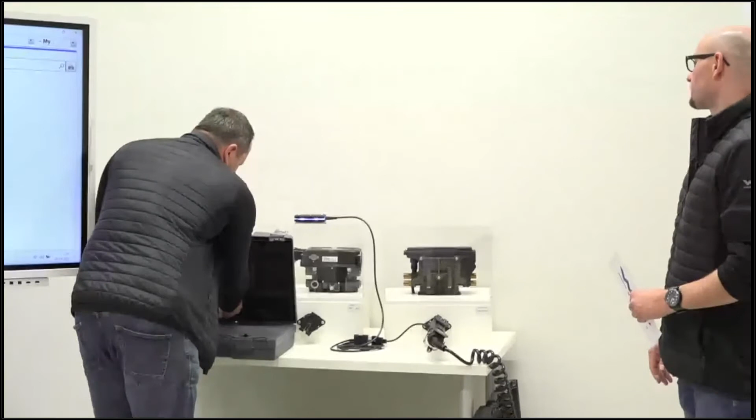Let's compare this to the original hardware solutions - how much hardware do we actually need? If we speak about the side sockets, we have to provide the same number of cables to make it 100% compatible, but the big benefit is that we just need 1 ISO cable for all of them. It's easier to handle, easier to keep in the case. So basically: ISO cable, VCI box, and maybe a few adapters for the side socket. If the customer only uses EBS, then you just need the ISO cable.

Then coming to the next step - how do I make sure which modulator I have in the trailer? It's simple in theory: if you have access to the trailer, you can make a visual inspection. And for this we provide information for whatever manufacturer you choose.

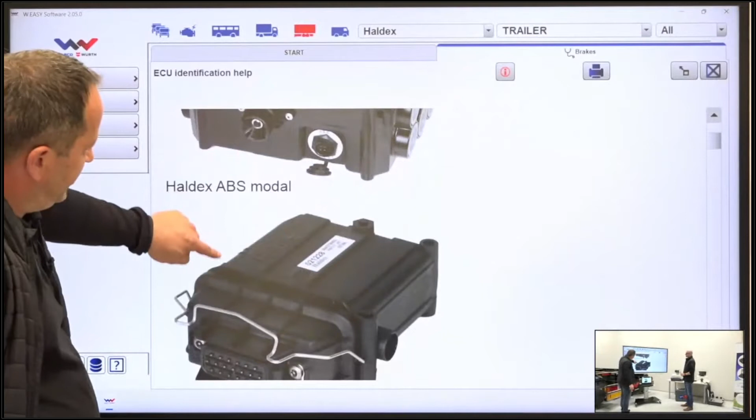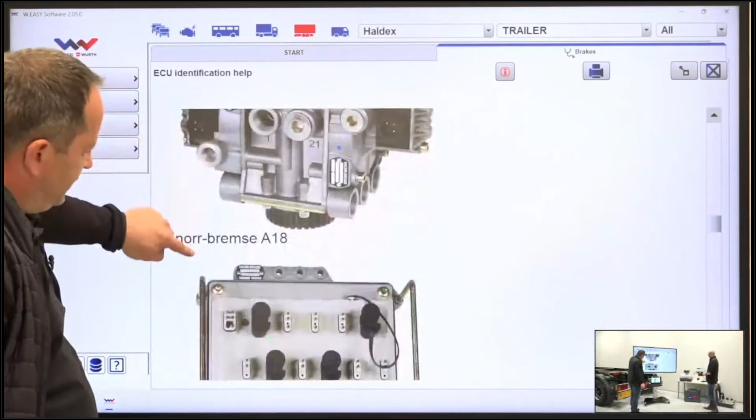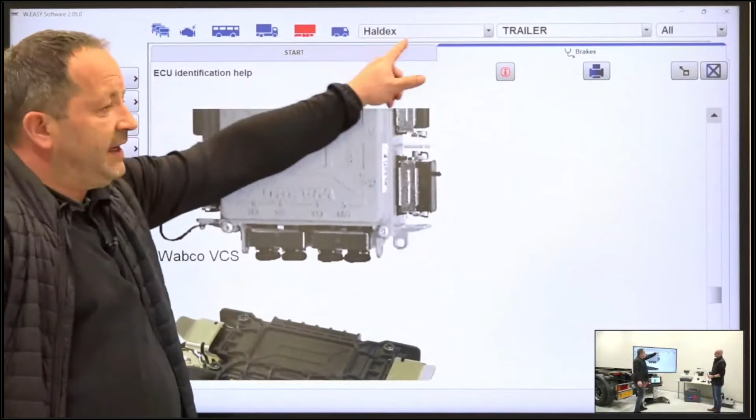For example, Haldex, because it's first on the list. You go to systems, and you have a category button which we call ECU identification help. Here you can find pictures with all the models they provide. So even if you choose Haldex, you can also see Knorr solutions, and all the generations of WABCO. So even if you make a wrong selection at the beginning, it doesn't really matter, because you can compare with your visual inspection - they are pretty different, so it's very hard to make a mistake.

Which of them are mostly used? It's very hard to say, it depends on the market. I'd say in most European countries, Knorr and WABCO are the leaders, but there are some countries like France and UK where you can find more Haldex.

I'd say this is the most common way to identify. Obviously, you can use some stickers on the trailer, you can see some advertisement from the manufacturer somewhere. But you have to remember this is also a part which can be replaced for whatever reason, so you can have stickers originally from Haldex, but it was switched to WABCO later on.

Starting with the Knorr Bremse modulator - if we know how it looks like, we can choose the corresponding manufacturer from the list here. We don't need this anymore, so we can close it, and go for the manufacturer selection.

And then obviously it's a part where you have to care about the power. So you need to provide the permanent power from the battery, from the vehicle battery, and you have to switch your ignition. This is very important, otherwise the modulator will not work. Sure, so we need to connect this to the source of power. In our case, in our situation, it's a case. We need to care about the ignition on, so key on, or there is a button in the truck, or whatever else solution, and then we can start to communicate.

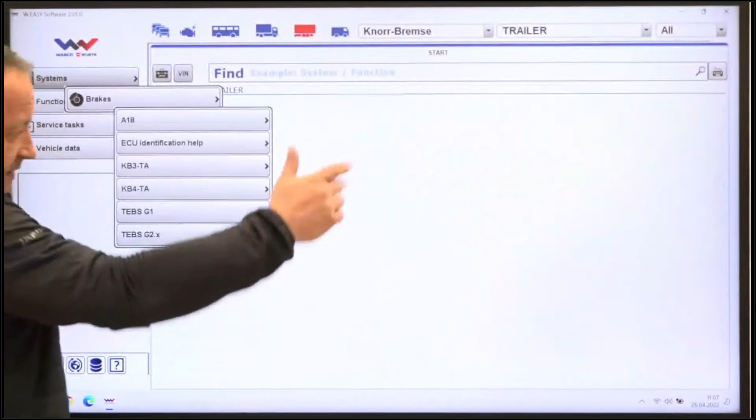So in this case, based on our visual inspection, we choose it's a second generation. In our software, we provide the function to automatically recognize which generation of the EBS it is. So if it's not ABS or the modulator, then you can use this button.

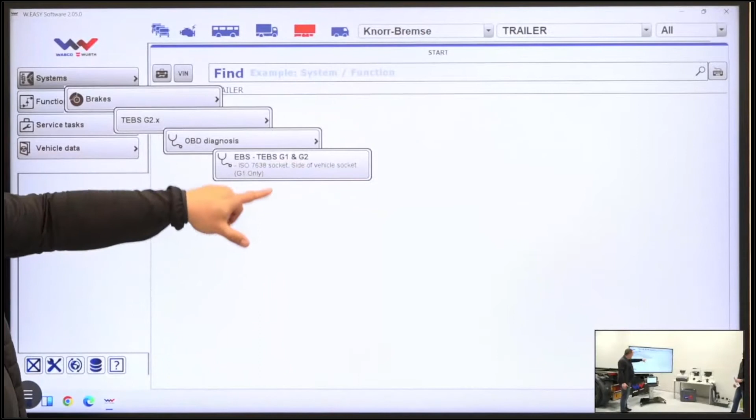You can see here, it does not really matter if it's a side connector or ISO cable. There is just one selection. Then the software will try to communicate with our box. So it checks all conditions, the firmware and other stuff is there, tries to identify the system. You can see the box is changing color, informing us about the status. And if it's connected, then you can see the menu.

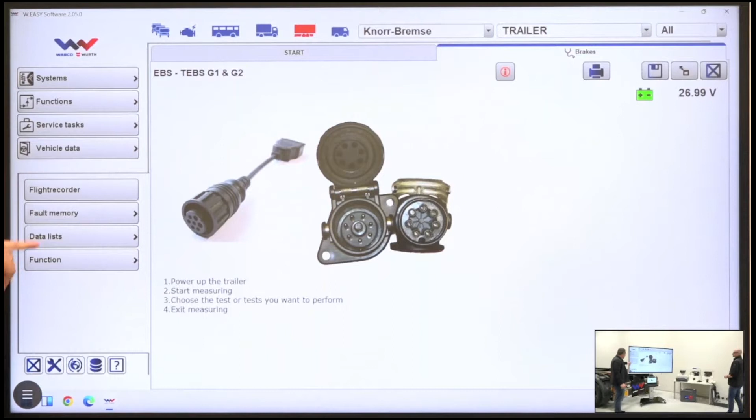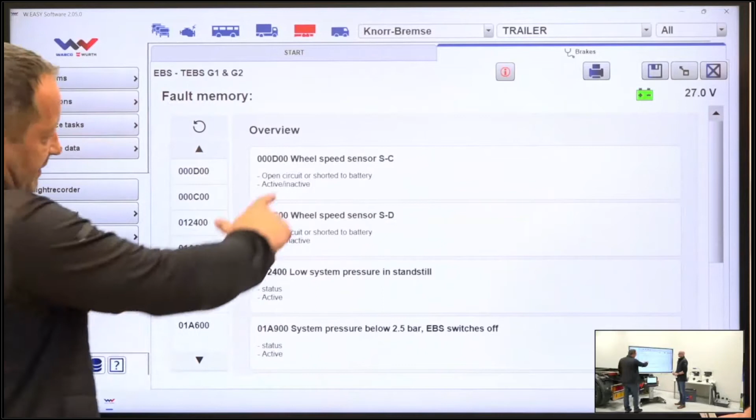So the first or most commonly used function is obviously reading the fault codes. This will be our reference to start to find the problem. So we have some indications about the wheel speed sensors. Obviously it comes because this is just a plain modulator without any accessories. So we have a trouble code number. This is a number which comes from the manufacturer, so it's not our indication, it's the original indication. There is a basic explanation of what this number means.

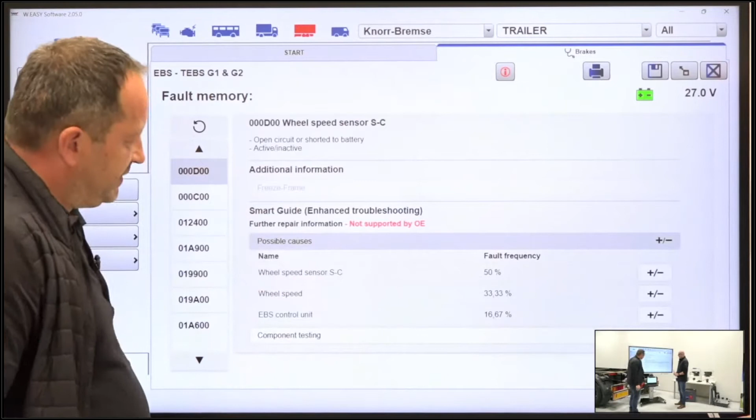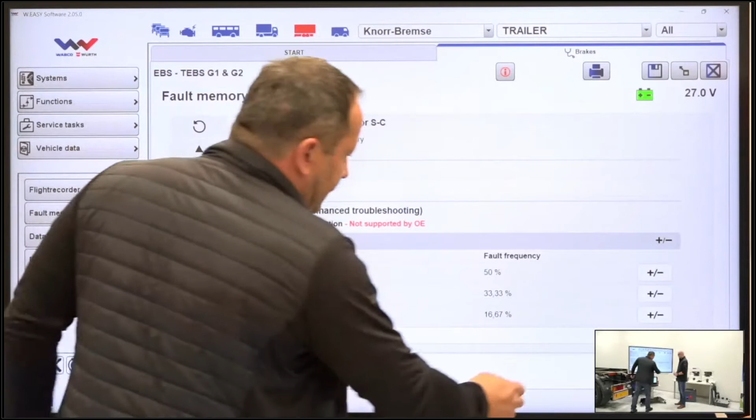Then you have a status, if it's active or historical or inactive or permanent or sporadic or whatever else. And what we also offer in addition is the step-by-step instruction based on, let's say, OE suppliers' statistical value about the possible causes, being part of the smart guide. Of course, we call it smart guide, but in fact it's some kind of step-by-step instruction. So you can obtain how often this happens. Obviously this could change during the life cycle, but this is something we can provide.

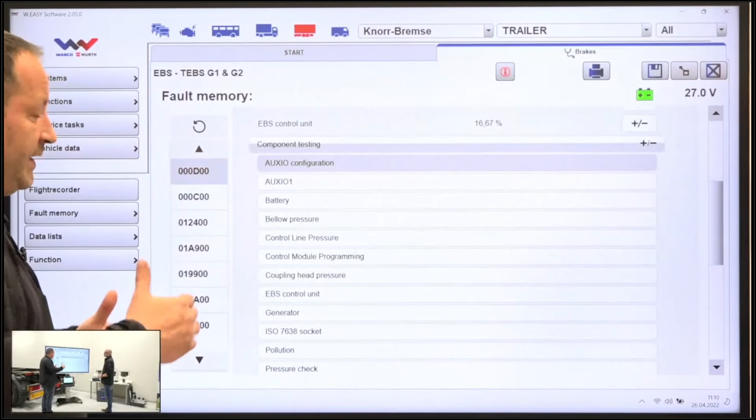And here we have also the category of component testing. So if you need some additional tests to provide additional information about what could be a cause, or to eliminate any other source of the problem, then you can go there and see a text description which gives you the impression of what you have to do step by step, what kind of values you should expect, and so on. So this is not OE software, this is multi-brand software which is provided by us, but we try to follow the OE recommendations for this.

That's a brief overview. I get connected, I can read out the fault codes, I can read some tips on how to fix the trailer again.

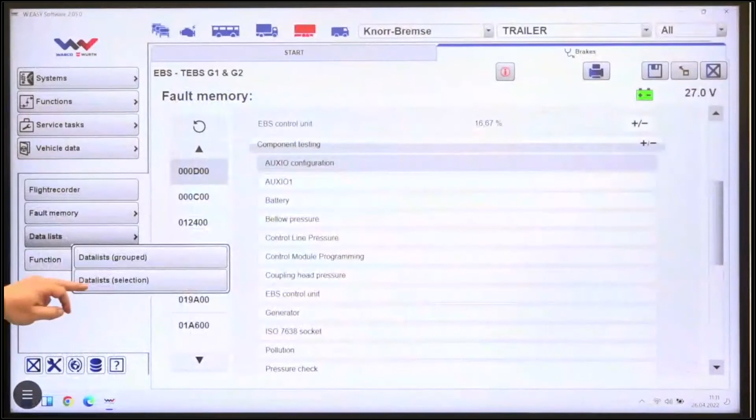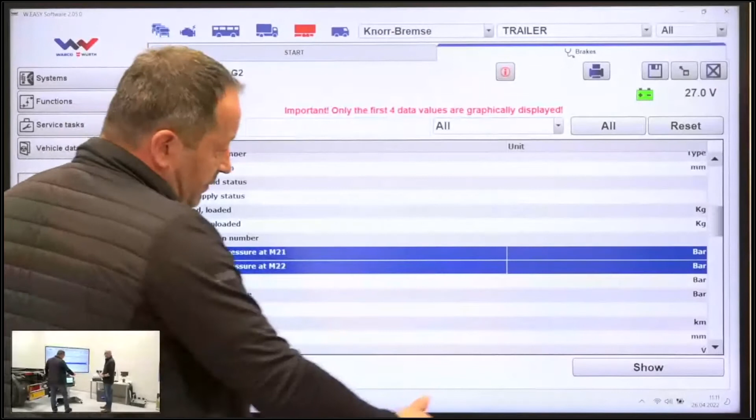Besides these features, what does the software offer? We offer more or less all the values which the ECU is analyzing. So you can take a look, for example, at what the wheel speed value is. You can see here the unit in which this is given. So for example, this will be the bar. You need to select what you like to see and click on show. The software will present the real-time data on the screen. Again, this is just a constellation of plain modulators, so we should not expect any miracles here, but at least in the real constellation, this will mean that the sensors are missing. So it could be a problem which is confirmed by the fault.

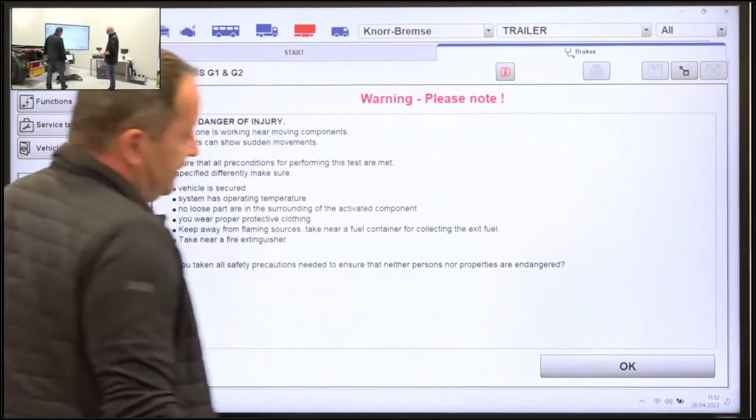Continuing to the function, we have a function category where, depending on the generation, you can find different features. Activations means you can simply send a signal to the modulator to power up, and you should expect that this component which is activated will change its status. You have to observe or listen or whatever else, so it's based on visual or organoleptic inspection.

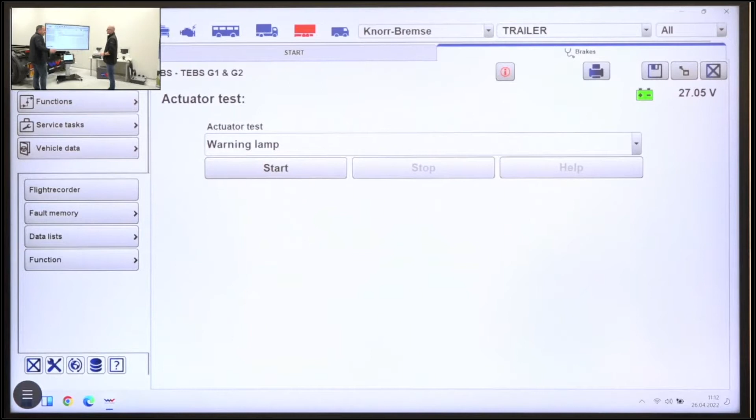Then you have self tests. This list is based on the OE manufacturer. So in OE software you can find the specific functions, and we try always to follow the same logic, the same philosophy.

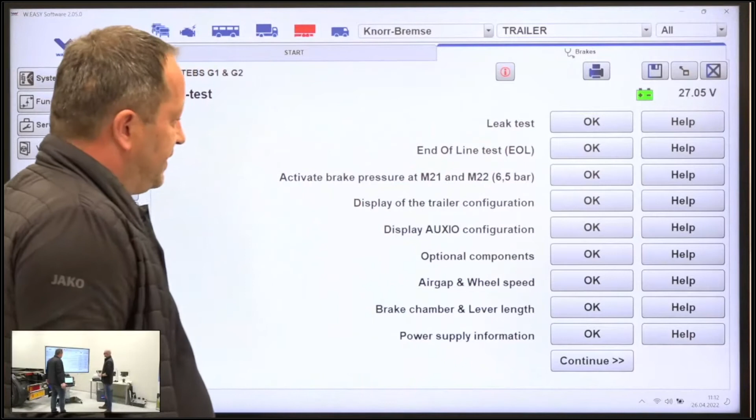You can perform the leak test, for example, if you are not sure if there is any leak in the system. The software will give you instructions on how to do it. You have a help menu which describes in detail what conditions you should fulfill and what you should expect from the function itself.

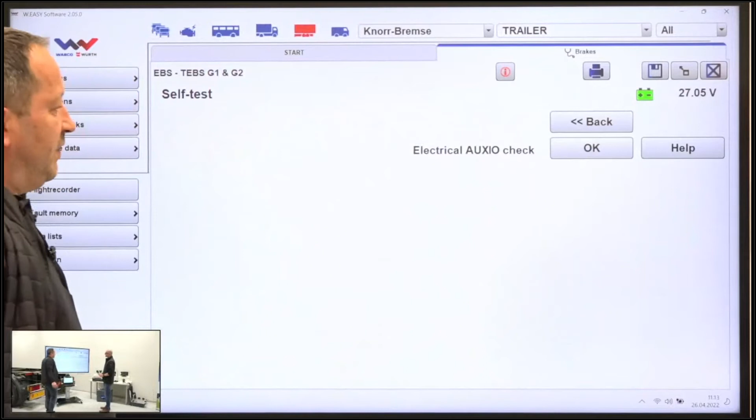We have an end-of-line test which you have to perform after the modulator replacement. You have some specific functions related to parameters, to read them out. You can create the replacement for the ID plate. You can also activate the electrical components responsible for lifting axle, leveling platform, or some external power. For example, if you need fleet management data, you need to equip the modulator with a modem which will send the data.

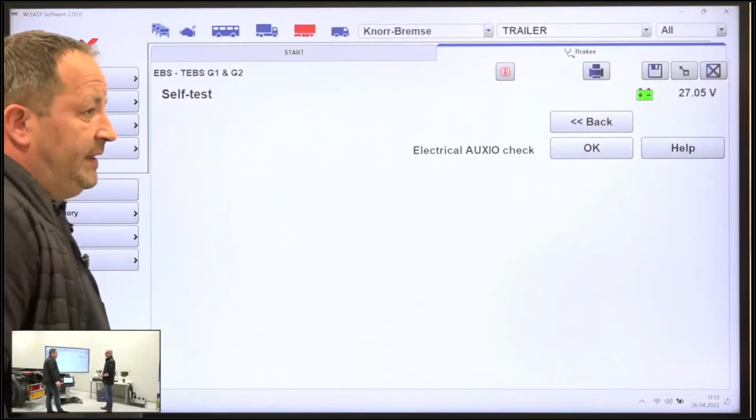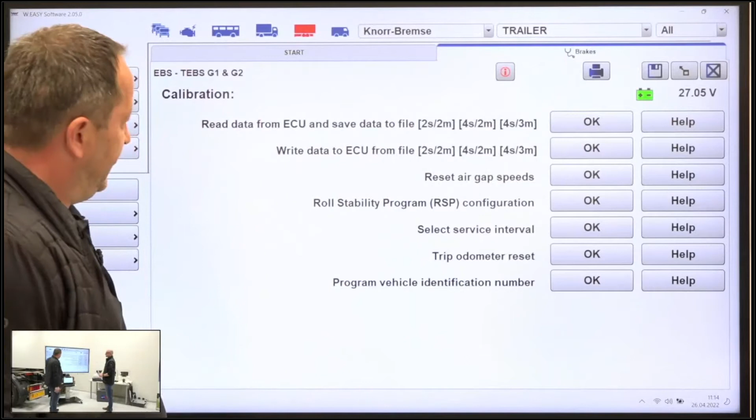And obviously, quite an important function, we provide the possibility to make a backup of all parameters to a file, then store it for the future. In case you need to exchange the modulator, you can simply take another unit, a new one or a used one, and transfer the parameters into the new unit.

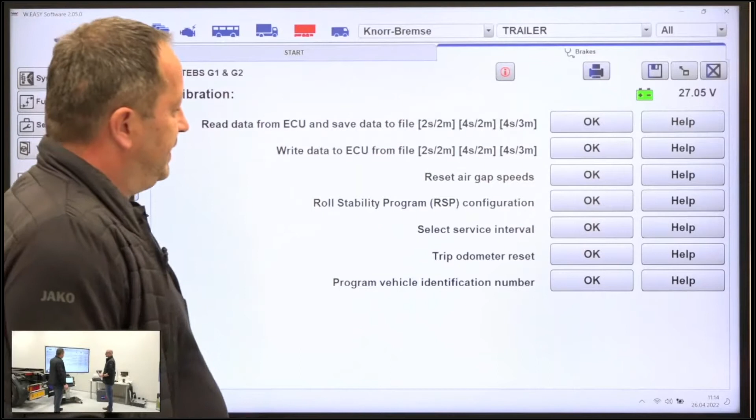You can also read out the service settings. For example, if it's set up that the modulator should indicate some mileage which happened or any other service indication, you can set up when it should happen. Then it starts to blink, indicating to the driver.

We offer also the possibility to change the VIN. If you use a used modulator which is already programmed, you can simply adjust it to the real trailer.

Okay, so this is quite simple in practice. It's nothing special. I suppose everybody can perform this.

So now we will close the communication with this modulator. Milan, please change now to Haldex. Just take care about the ignition.

And so now again, VCI is indicating that it's powered up, and then we need to change our manufacturer to the corresponding one.

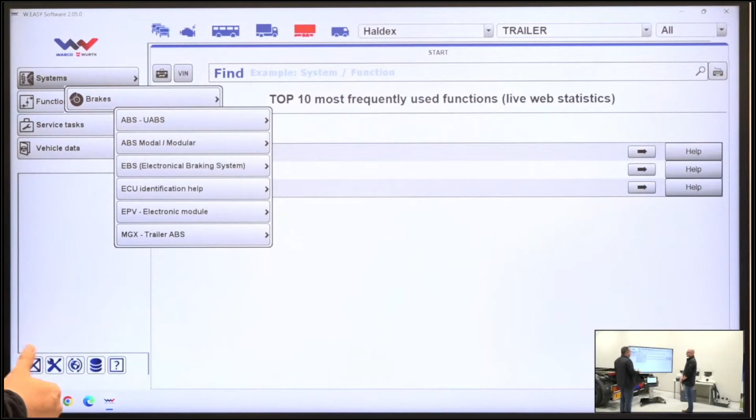Again, we offer more or less the same selection, so you should be comfortable with the menu at least. Obviously our idea was to integrate most of the OE softwares available on the market. So in the case of Haldex and WABCO, we offer the OE software, which is embedded in our framework. It means we offer identical OE software, which is supplied by the OE manufacturer, but integrated in the same framework. In this case, it's an EBS generation.

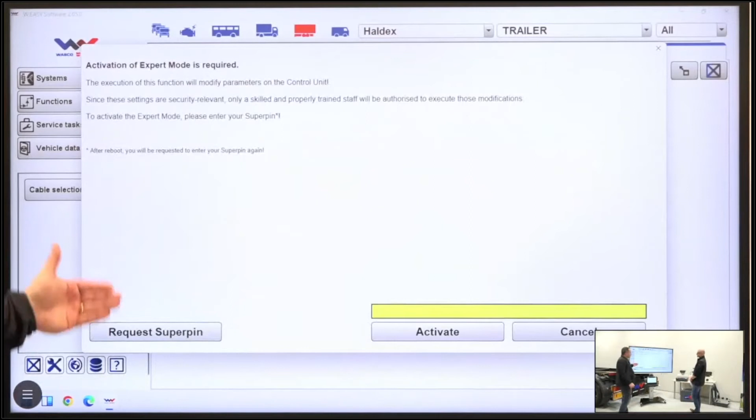And now we need to provide the super pin. Super pin is access to an expert mode, which is given in exchange for confirmation to any customer. It's not really related to any specific training, like in the case of WABCO. It's something you will receive in exchange for a signature. It basically gives you access to all the features in the company, and we provide this feature to a company owner or workshop manager so they can internally manage who they share the super pin with.

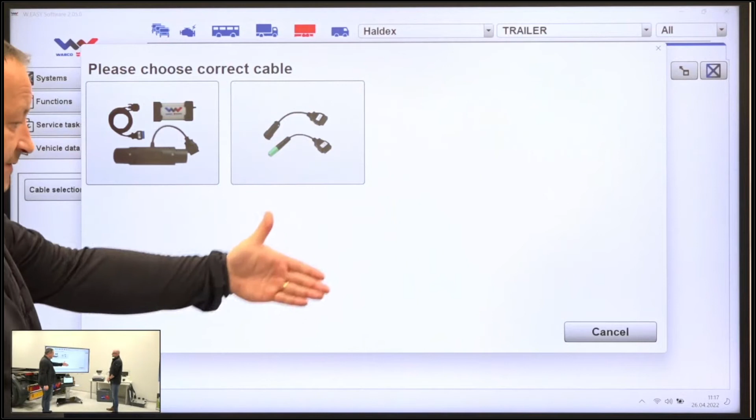In this constellation, it looks a little bit different because, as I said, it's an OE application integrated. So we have to choose which type of connection we will provide. We just follow the real conditions. And then the software will try to connect.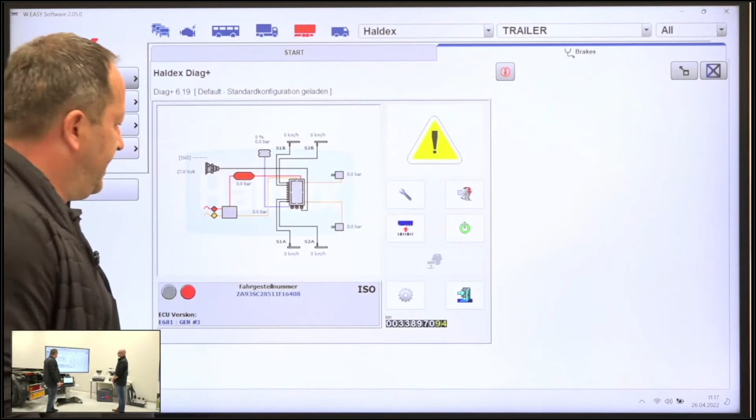And on this initial screen, we should see the actual status of the modulator. You should be able to see some electrical values, if it's powered, if there is any air supply - obviously not, because it's just a plain modulator. Then fault indication, if there are any.

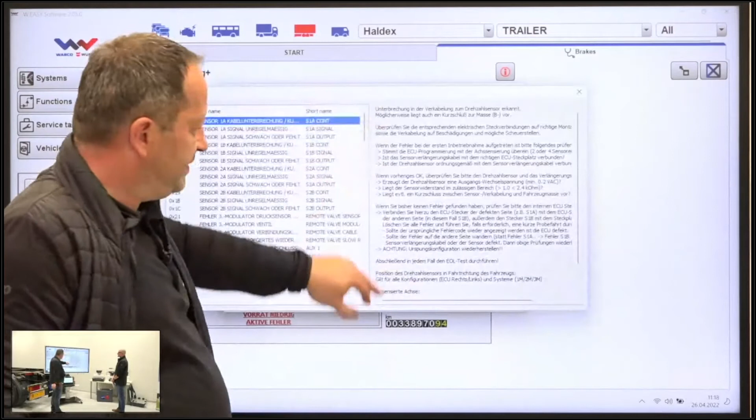So the most commonly used function is the reading of the fault codes. We have a split in the colors: red means active, black means not active, and we provide the same logic. If we double click on it, or use this green mark, we will see what we call environmental data - the conditions in which the fault was registered. Then we can click on additional information to get the instruction, very similar to our smart guide solution. Sometimes this text is longer, so you have to scroll it down.

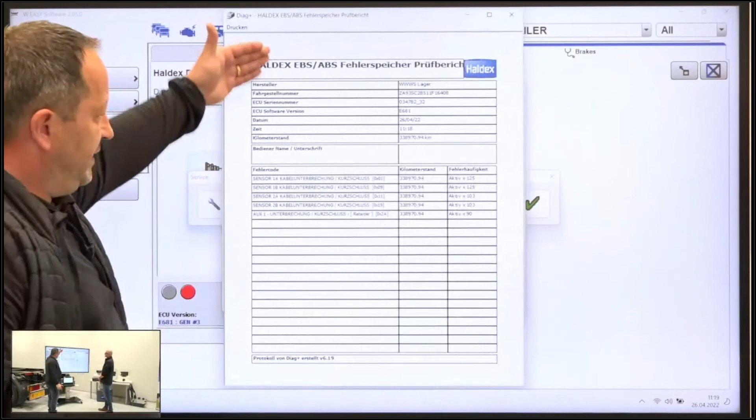And this is provided for all trouble codes existing. So this is OE data, the most trustful source of information. If there are many fault codes, we can use these arrows to switch between them. If we speak about reporting, we also offer this OE format. For this, you can make a printout or save it to PDF.

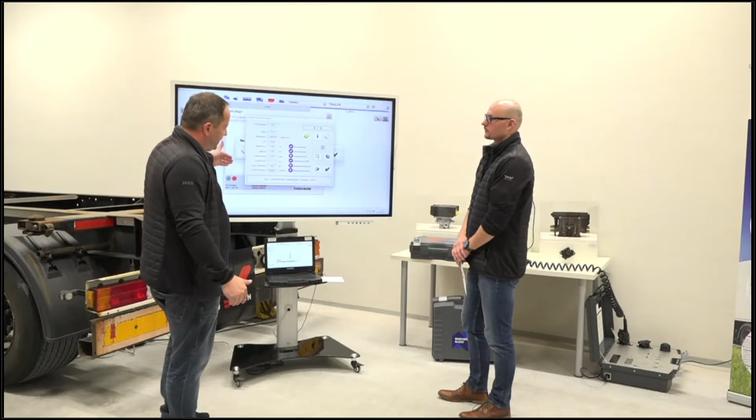We might mention the logic of Haldex, which is related to the super pin access, which gives you access to everything. Haldex do not limit any functionality from their software, so every operator is responsible for what he's doing. In theory he can do whatever he wants, but since he's changing the parameters, he's responsible. That's why we provide this super pin request, and all operations are registered based on this super pin. So every super pin means a physical VCI, which belongs to the physical customer.

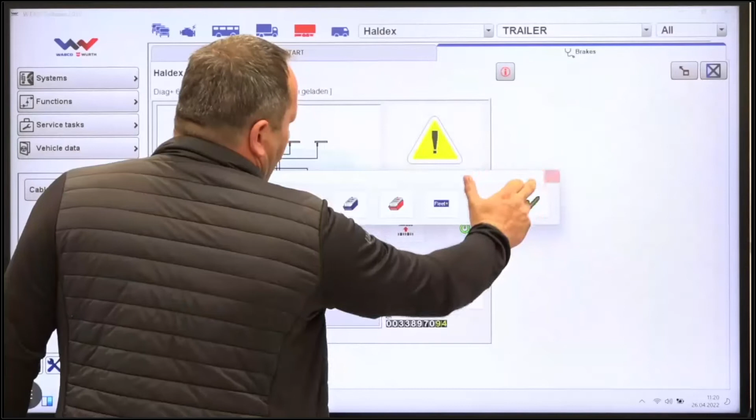And if we came back to the cable selection, there was not just the option to select the ISO cable, but we could also select the two other cables, in which instance we use this option. So if, for whatever reason, we don't want to use the ISO cable or it doesn't work, we can exclude the problem from the ISO cable itself or from this main cable which goes from the truck to power up the modulator. We can use the side socket.

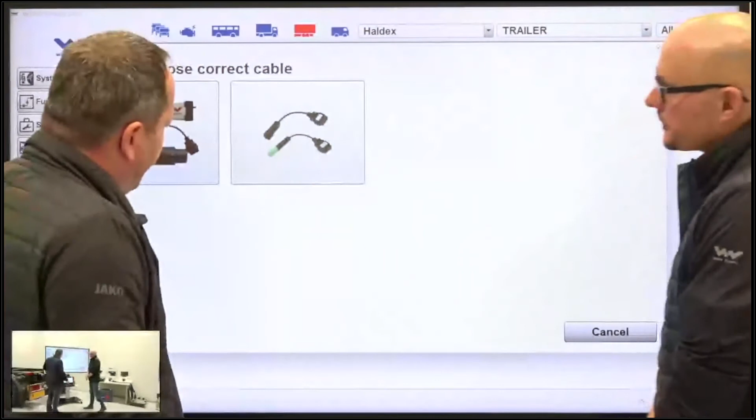And then in terms of Haldex, what is the difference? The upper one is the side socket - if the trailer is equipped with the side socket, then we use the one which looks like this. I've shown this already based on the case. And this one with the green tip, we put directly to the modulator. It was very common in the past - the first generation of EB+ system and the second generation was equipped with the green socket, with the green plastic clamp, so you can easily tell where it should be fitted.

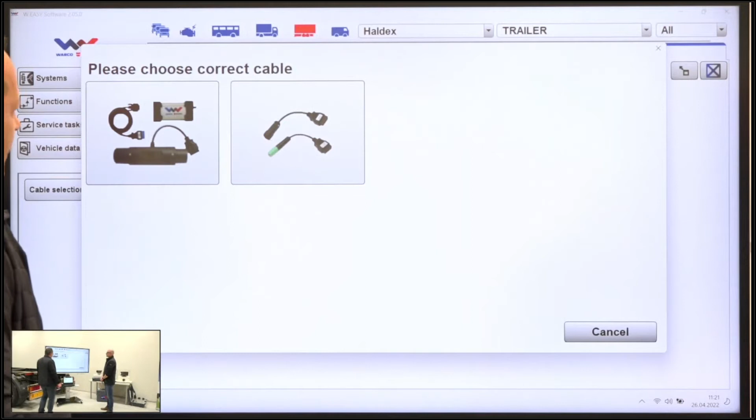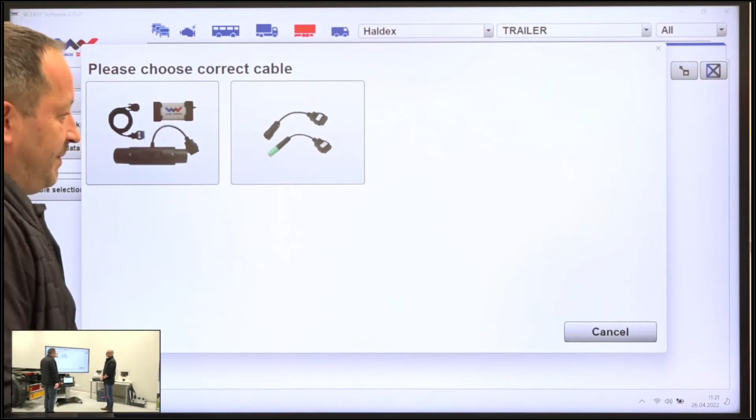So obviously there is some technical specification, because here we use 24 volts, here we use 5 volts for the communication. That's why there is a split. But besides that, almost every solution that comes from WABCO or from Knorr also offers the connection over the side sockets.

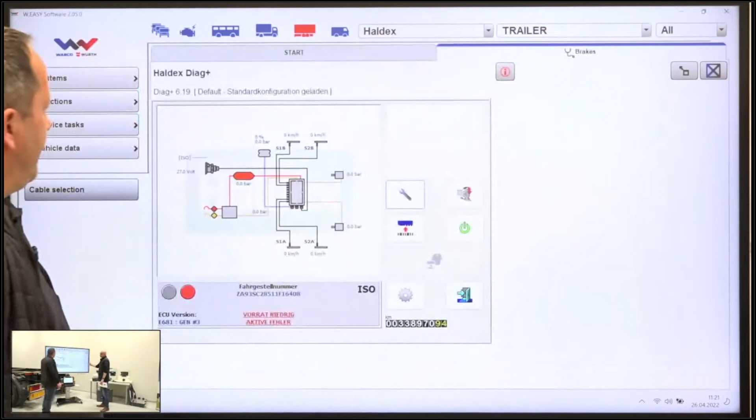Okay, there are all the features that the software provides. We have obviously some bigger or deeper functions related to the parameterization, to change the orientation of the modulator for example. So we can show this here.

So the software gives us the possibility to have, let's say, different locations of the sensors. It depends on the construction. You can use some external sensors if you want, or if there is any reason you need to change your orientation, you can split this.

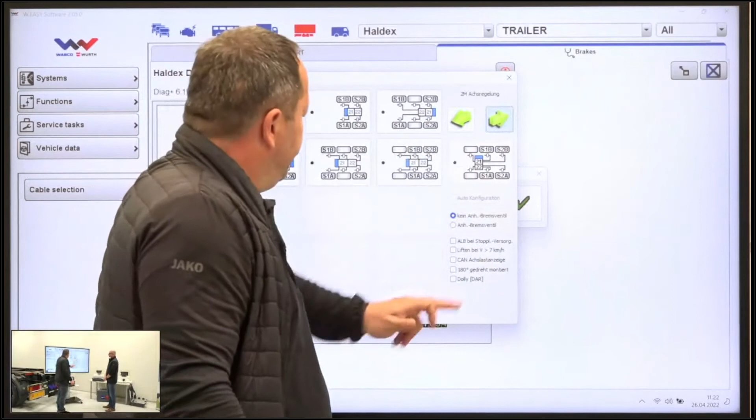So there is a lot of features here. Here is the overview about the weights and corresponding pressures. And some external devices which are connected or not - so you can integrate the lifting axle sensor or COLAS leveling platform solution, or you can provide some external power for external devices and so on.

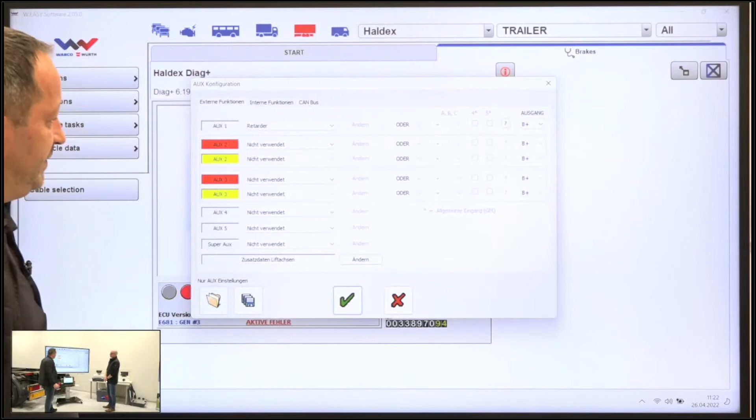Definitely there will be more features that we can cover in the time given. Let's move into the third manufacturer. So we need to close the software, and now we will provide the real trailer, because we have here in the studio the trailer which is equipped with the WABCO. So we will change now the source of the power, and obviously we will teach in the box. So let me power it up.

And in the meanwhile, I will go to settings and change to the second box, coming to devices, diagnostic box. Okay, we need to wait for the box to be charged.

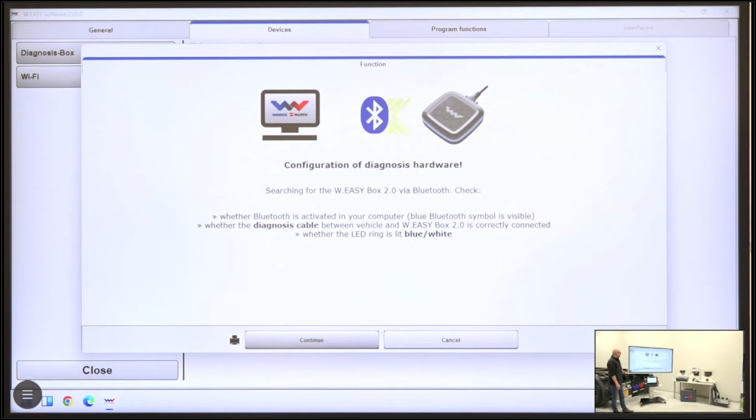Okay, it's here. Now, how do we connect to a WABCO modulator? The way of connection is more or less the same, so we need to choose the right manufacturer.

Again, we can use this identification help at the beginning just to obtain, in this case, it's a WABCO OE, so TEBS-E.

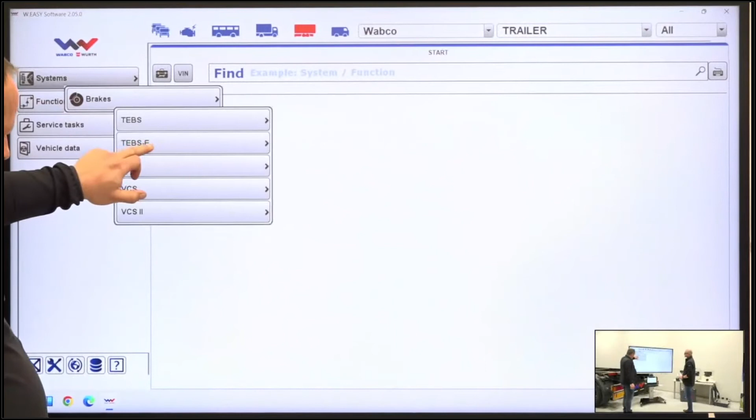I would suggest always to use the newest software, because then you are sure that you are up to date, even if it's a very new modulator. And then it's quite similar to Haldex, yeah? You need to select which cable you use.

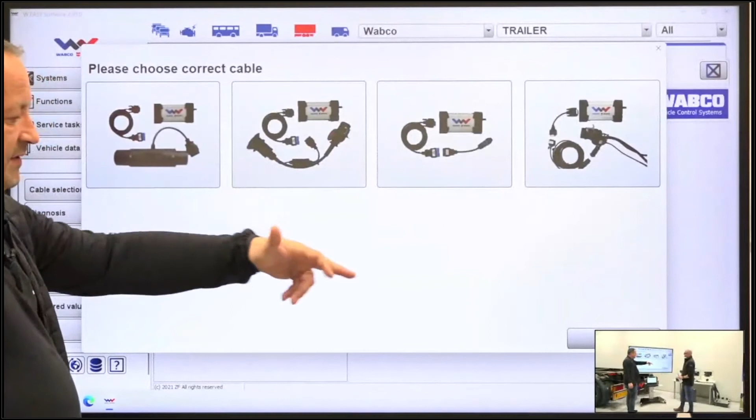Okay, so I have quite a few options. So we still use the same cable like this one. We need to click on this, and then it depends on the construction.

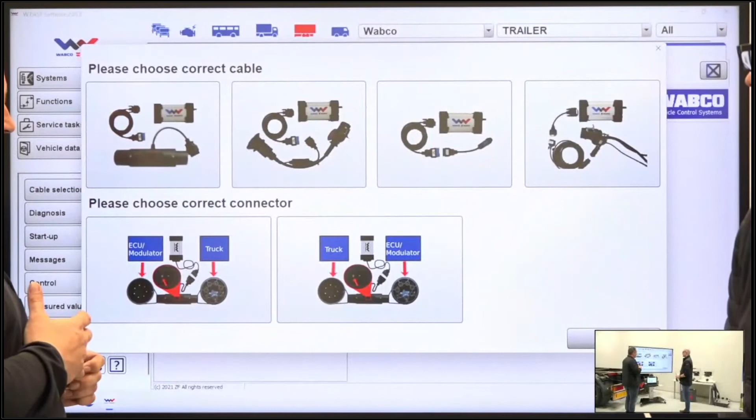So we would say there are two types of trailers, we call it trailer and semi-trailer. Semi-trailers are always equipped with the socket, and some trailers are equipped with the direct cable connection. So depends on which side is our diagnostic connector, we have to provide the information to the software.

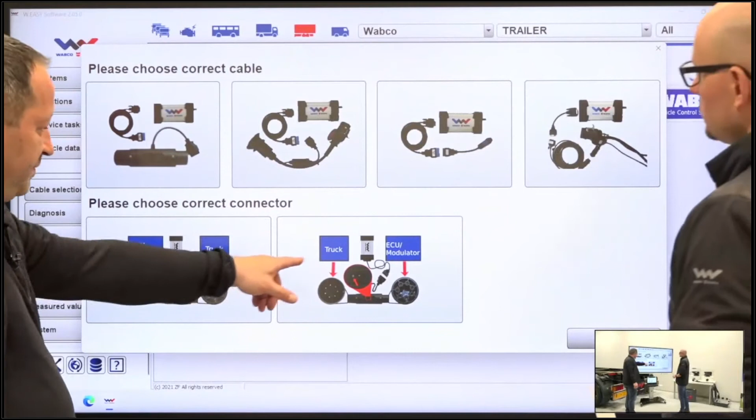Okay, so in this case, if we do the wrong selection, then obviously we will not get the communication. We will provide also some troubleshooting here. So if there will be any problem with the connection, it will be indicated from the software.

So let's say we will select this picture, and then diagnosis. It will ask us how we would like to connect over the ISO. Connection, what are the options I should choose? So in this case, we are connected with the ISO cable.

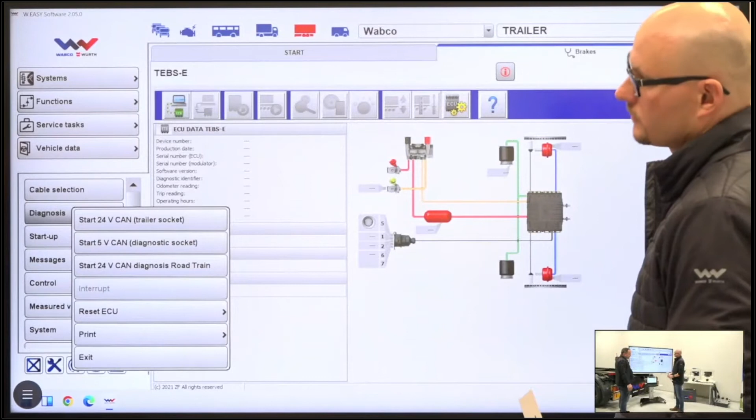We got 24 volts from the power case, from the truck, sorry. So we need to choose this one or this one, but in this case, what happened first if I chose the 5-volt version? Nothing, there will be no connection, obviously.

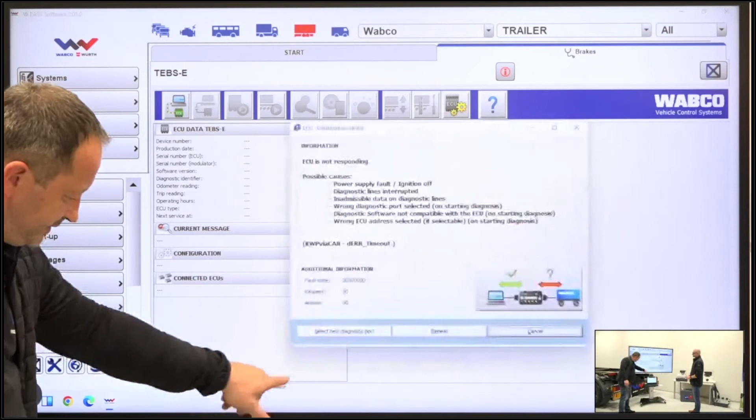We have a status here, so it shows us what actually the software is doing, and now we obtain a situation where we have a problem. It shows us there is a connection between the PC and the VCI, but not to the vehicle. Okay, this is just an example. It could be a different type of trailer here, but nevertheless.

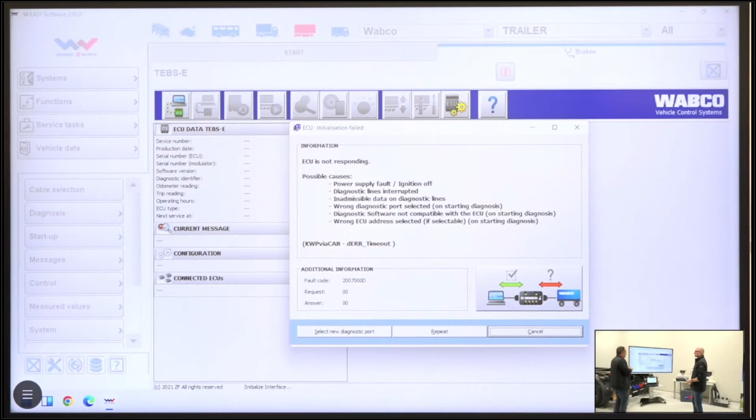Okay, and so now we are going to the point where we would like to solve the problem. We have a list of the potential reasons. So we have a symptom, no communication. So whatever software we will use, it will not help us until we fix the connection problem.

Exactly, that's why we provide this list with some most common situations you can find in the real diagnosis, and it's not a coincidence that the power supply fault is listed as the first one, or you can simply make a mistake and forget to make an ignition on. So in this case, we have to eliminate the source of the problem by measuring the cables, for example, with the multimeter or any other measuring tools, bulb, or whatever else.

Or we have to, which is a better solution, use some spare parts which are available on the market. So in this case, we will demonstrate, if I would like to be sure that it's not related to the power, then this is, let's say, the OE spare part, which could be delivered with different sizes or different lengths. And this is the longest one.

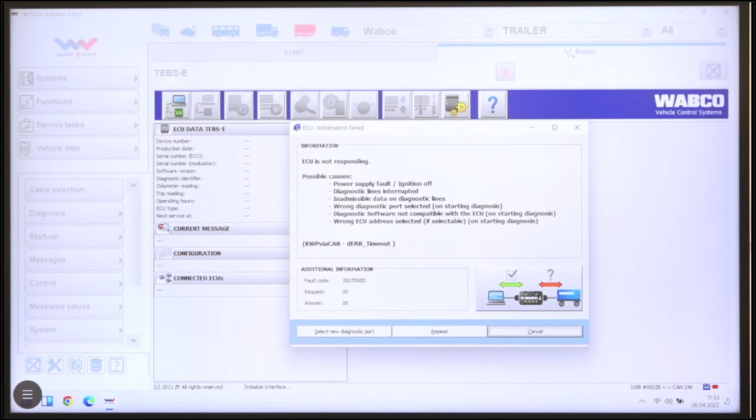Now it's on. Okay, so now again we hear this noise. Minor delay, sorry for that.

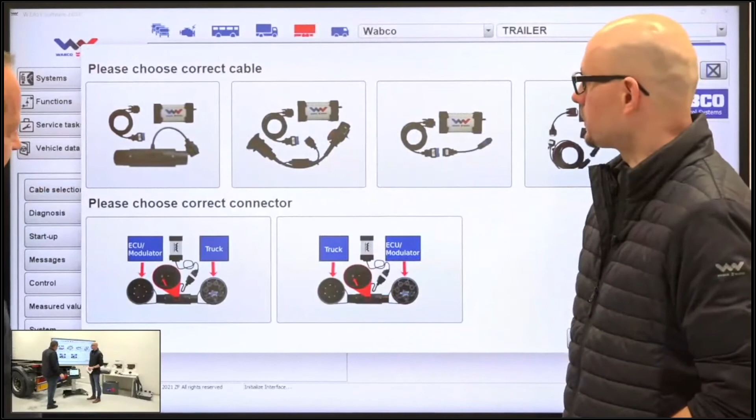So I would suggest making another selection, cable selection. No, we need to go to the second one. Okay, but this is the idea, yeah? What kind of cable you are using.

So if we choose a different type, then we will have again some other selections here. And depending on the orientation, we will choose the correct one, the one which we used, in fact. Okay, the software informs us, yeah, we will see the status.

It may take a while. I'm not sure we can see the box, but anyway, it should inform us about the process.

Maybe it's just taking its time. The question might be how long is too long? But that's why there is a fault indication. So we always have to wait until we get any statement, meaning till I get some message, I simply wait for the modulator. We have to follow all the steps in the troubleshooting always. So let me try to initiate this for the second time. Okay, let's wait. Maybe the power is...

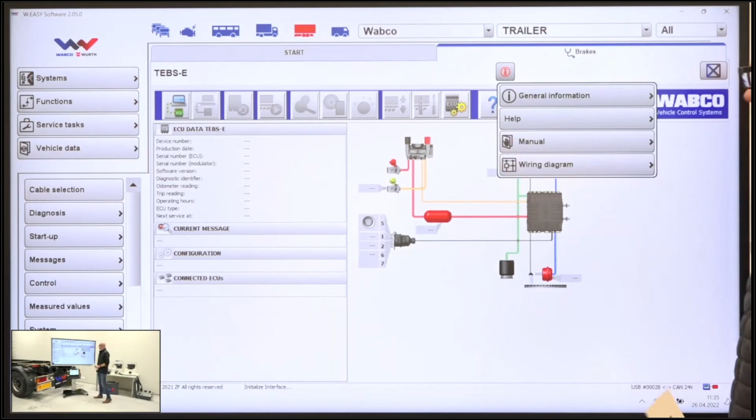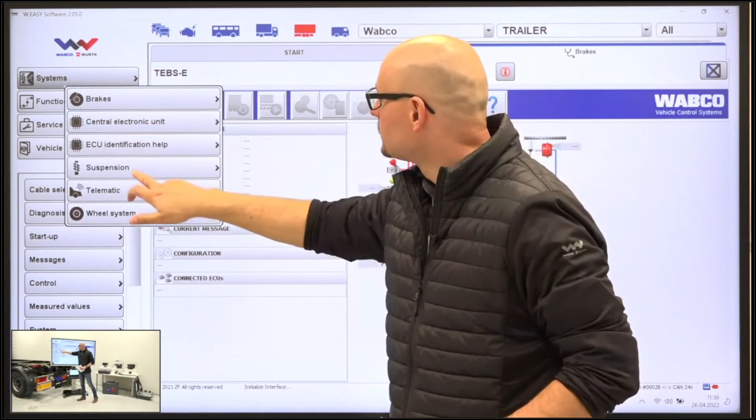Which gives us easy access to the related file, which we have as part of the technical data package. Those are the same data available under systems. Tabs are conveniently available, accessing with only one click. I can even open the wiring diagram, just select one of them, and it will open in a new tab. Just use the time to show some of the technical data.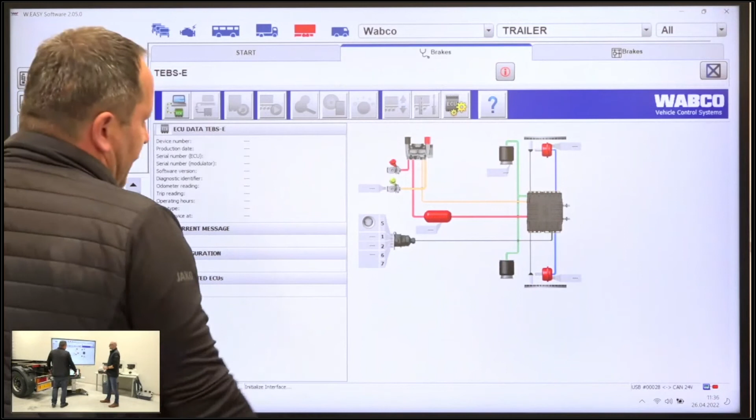So now we exchange the spiral cable between the truck and trailer, just to eliminate the second source of the problem. I can see the software is still trying to run. So what is the advice now? Yeah, we can try to close it.

Advice from my side: if you close the software before you close the physical connection, always try to make an ignition cycle again, which means turning it off for 30 seconds. Because if we get a situation in which there is still a physical connection and the software is not informed about it, then you can expect a lot of issues.

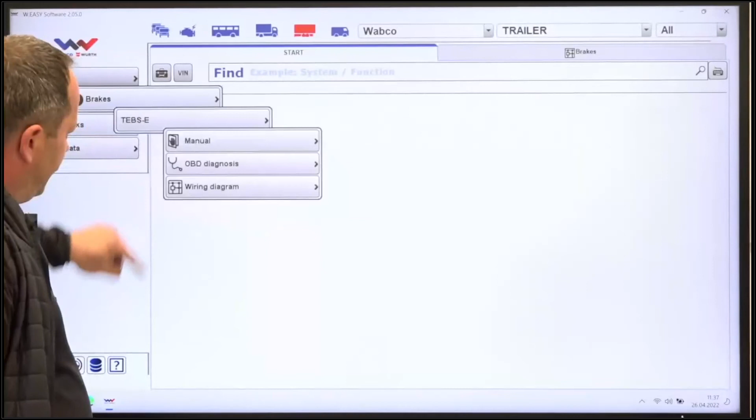So we now choose again the modulator. Of course, you can make a mistake here also if you choose the wrong side, and then you need to try again. And if I'm not sure, there are just two options, one way or the other. But these pictures should give you the impression of which one is the right one. Diagnosis.

So it's initializing. Okay. Reading ECU information.

There is no guarantee that if you follow this list, you will get the solution from the first point. That's why they provide the list. Sure, so you have to check all of them.

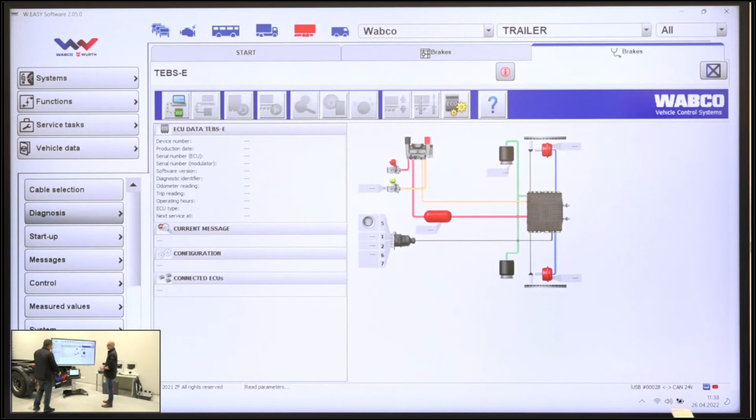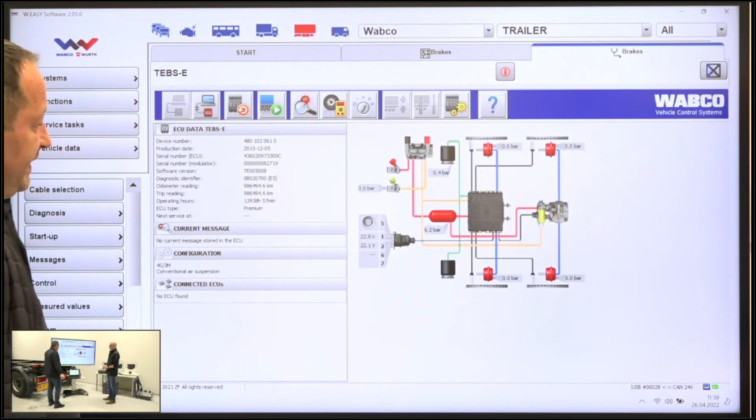And the indication for us that we are connected is first the identification plate, which gives us the device number, the production number, the date of production, the serial number, and so on. Some important entry data. We have a very similar overview here, let's say, like in Haldex software.

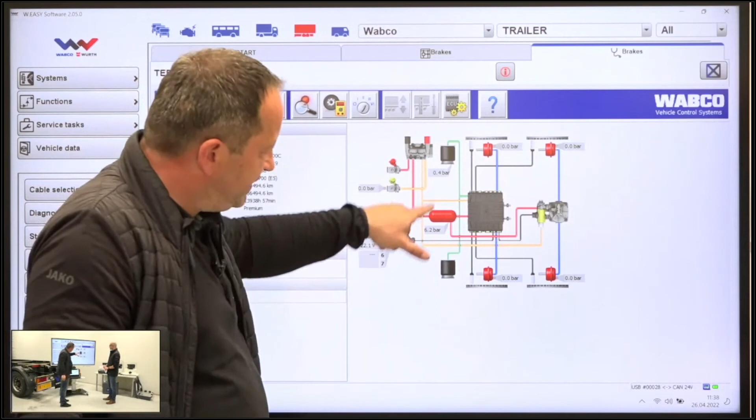So there are some component locations here. We can treat it like a basic schematic of the system. You should see here the electrical and pneumatic values. This is the pressure which is actually given to the trailer. So there are some reservoirs here and some values after some tests which have been performed in the past and so on. We do not have any parking brake engagement now, so that's why we can see zeros here.

And here we have a menu which corresponds to this menu. So if some customers are experienced with WABCO from the past, they can still use these icons on top, but we also provide these multi-brand style buttons here. The meaning corresponds to the WABCO logic, so there are no trouble codes, just the messages here.

And actually, we do not have any faults registered from this trailer. Okay, second, this is the point where we want to get. We tried a different cable; in this case, it would have been a problem of the physical hardware.

How much do we recommend using their own cable, or how much can we rely that the cable between the truck and trailer is working perfectly fine? Because we have to be... from the workshop perspective, you never know what will come to visit you. Does it make sense to have your own EBS cable as a good recommendation? Of course it makes sense, because then you are 100% sure that this cable works. If I don't have the spare cable, then you have to use any other way to find out if it's offering the continuity. So you have to measure and try to find where it's cut or rusted or whatever else.

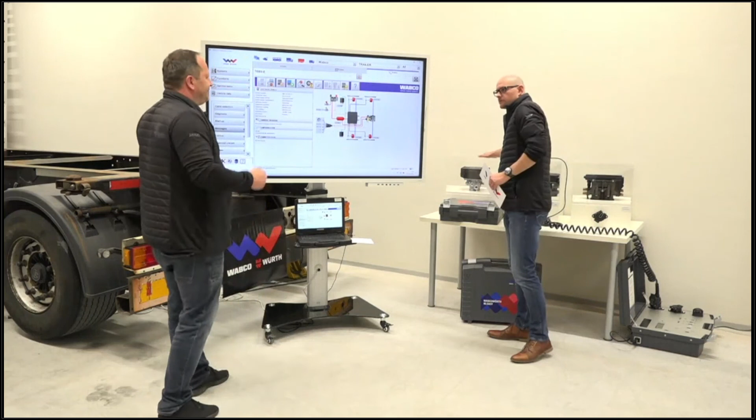But it could also be that you choose WABCO, for example, but you have a physical Haldex modulator connected. This is part of the WABCO software. However, am I limited only to WABCO hardware?

No. CanViewer can be used for every communication between truck and trailer, if there is any. It doesn't really matter, it's a standardized software, so it offers the functionality to discover all the problems based on the CAN communication. It's nothing related specifically to WABCO, Haldex, or Knorr.

But it's produced by WABCO. It's a great help anytime in case I don't want to tweak with the cables. Or you just want a clear situation, for whatever reason, and want to obtain this quickly.

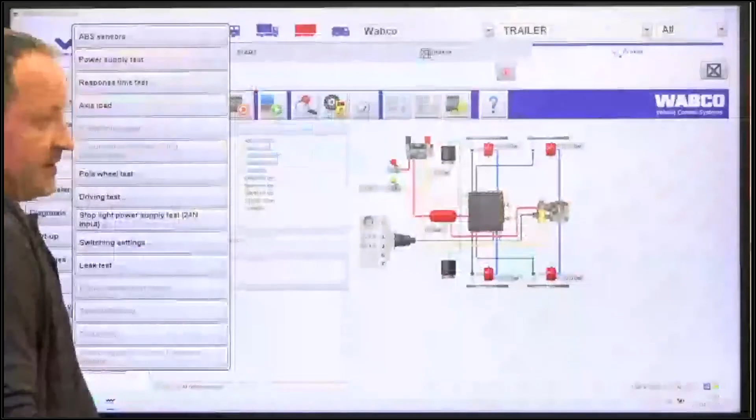Can we just quickly check the communication? Yes, but we need to switch to the USB cable, so we will do this later - obviously.

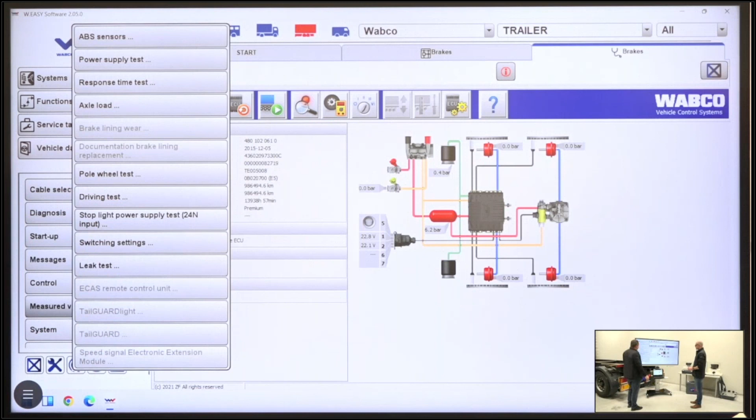From the perspective of WABCO, we offer identical software like the OE supplier, so it's only embedded in our constellation. You have all the features which are provided, like service partners use in the workshop, and so on. It's not limited to any region or field where you cannot do something. Obviously, there is a philosophy coming from WABCO - they provide trainings for their customers, and based on this, we have here...

Sorry, I have to adjust this a little bit. Let's go for diagnostic memory again.

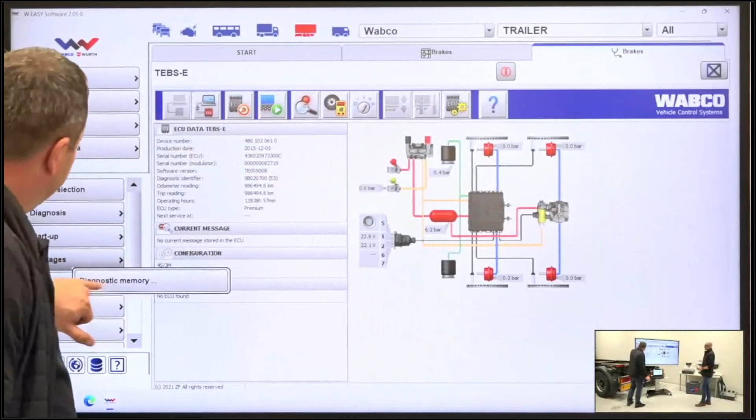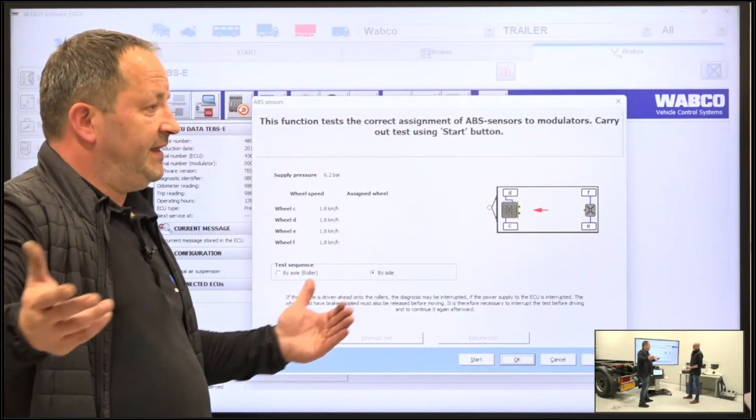So we fulfill all the requirements if we have any fault codes, descriptions, or measuring values. For example, here it's groups where you can see specific values given in specific units or with ABS sensors. If you have any doubts which sensor it is, if you have a message coming from the software saying it's sensor D or sensor F, it doesn't really give you the impression if it's left side or right side, but the modulator could be configured in a different way. So it's very relative - here you can see easily which sensor is located where.

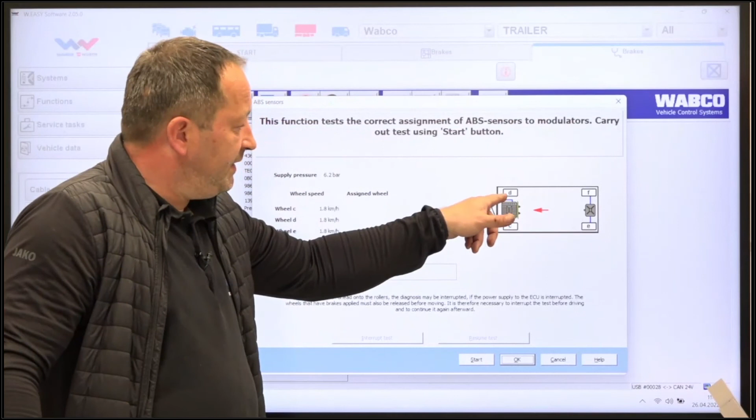Jacek, by this we ran out of time. So basically, to summarize, using just a few hardware components, we are able to connect any manufacturer of the modulator. We can really dig deep with the diagnostics using the original software. It's a convenient way to reach them.